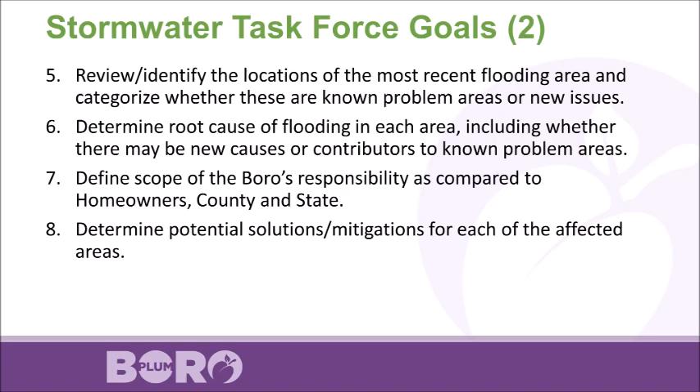Prioritize which solutions can be implemented based on technical feasibility, implementation time, costs and available funding, and the nature and scope of the solution. Implement an educational program that provides residents with information on basic stormwater concepts and best practices for stormwater mitigation. Set realistic timelines for the implementation and completion of any solutions in line with the anticipated manpower, regulatory, and funding realities. Recommend solutions to Borough Council for their consideration to implement, and communicate the progress and results to the public through a report at the monthly council voting meetings.

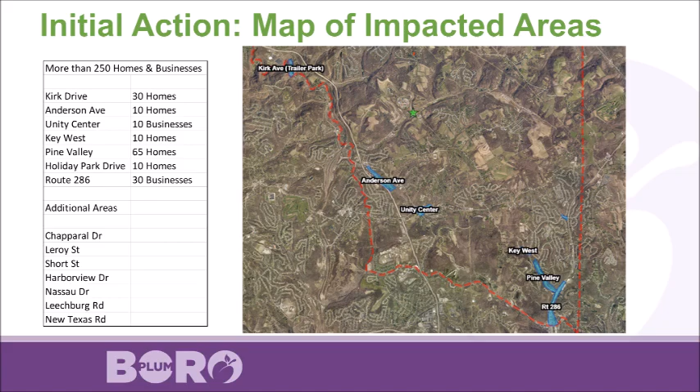One of the first actions of the task force was to identify affected areas in the borough. The task force started by identifying those areas impacted by the July 2019 flooding and other areas within the borough that are prone to flooding. This resulted in the following list of impacted areas. This is a view of the geographic area that includes the more than 250 homes and businesses that were impacted by flooding. Based on the identification of impacted areas, the task force determined the best way to proceed would be to develop a list of both short-term and long-term solutions for each of the identified areas where applicable. This strategy was chosen so that incremental progress could be made on several areas of concern while determining how to address the larger, more systemic issues. Estimated completion dates would be developed for the short-term solutions, and these would be tracked at each meeting to completion. The long-term solutions would then be developed with input from the borough engineer.

Now we're going to discuss the details associated with both short-term and long-term projects. We will begin with the short-term projects. Short-term projects included Anderson Avenue, modifying the existing water flow from the turnpike; Leroy Street, installing debris catcher system; Oblock Key West, diverting stormwater from the stream into the storm pond; and Nassau Drive, replacing the deteriorating pipe and beehive grate.

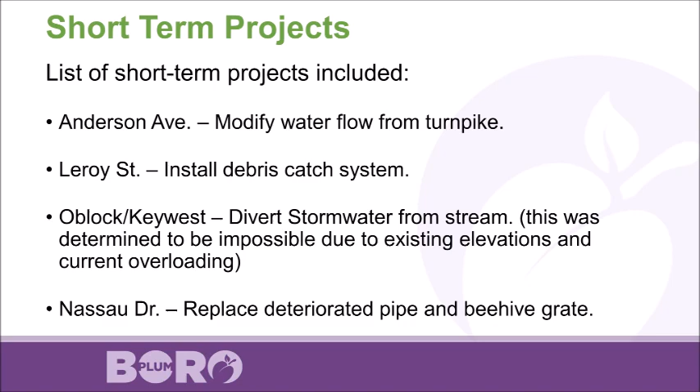3 separate drain pipes carry stormwater from above Anderson Avenue and the Pennsylvania Turnpike to the stream below Anderson Avenue. Borough crews modified the outflow angle of these pipes to reduce the friction and improve flow direction. Additional riprap was also installed to further reduce inflow velocity and erosion at the discharge point.

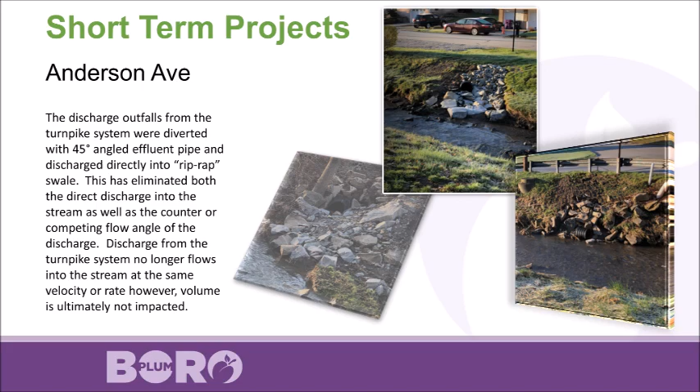Borough crews redesigned and manufactured a proprietary design trash rack or debris catcher to prevent large objects from entering the head wall opening of a culvert pipe. This new design was installed at the culvert crossing under Leroy Street and is now our standard design for all culvert head walls.

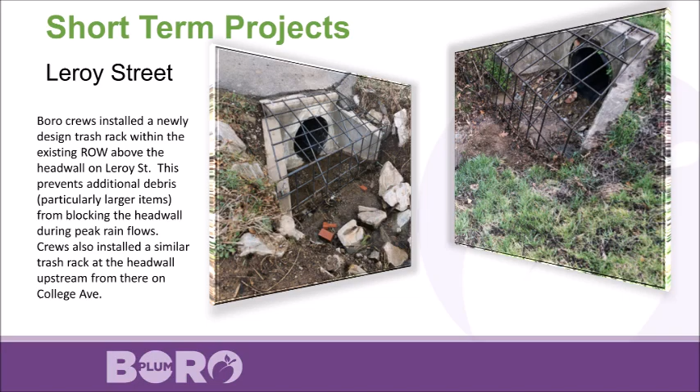In Phase 1, borough crews replaced 180 lineal feet of 30-inch smooth-line plastic pipe and relocated 1 sanitary manhole, which was necessary to install the pipe. The total cost for this phase of the project was $150,000.

In Phase 2, the beehive grate was removed and a head wall was installed. The pipe distance was reduced and a riprap swale or basin was established to avoid stormwater overflow bypassing the drain pipe and rushing past the pipe and onto Nassau Drive. A trash rack or debris catcher was also installed.

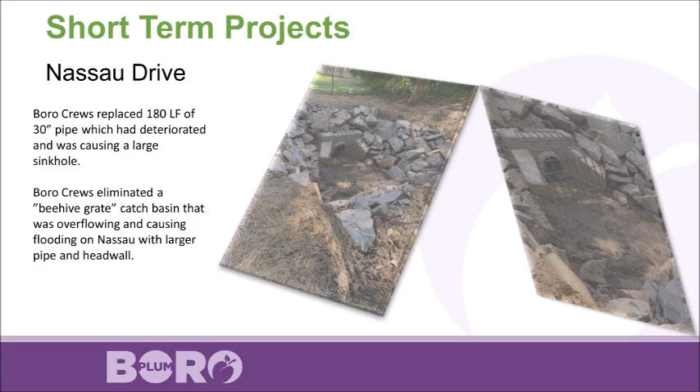Borough staff proposed the idea of identifying strategic locations throughout the borough to investigate possible upstream stormwater storage or impoundment to specifically address the flooding in the identified impacted areas.

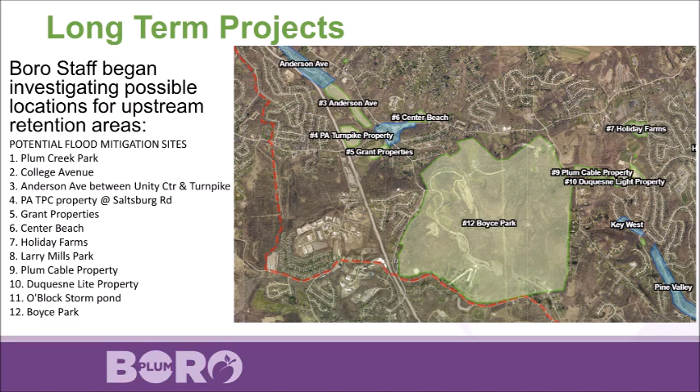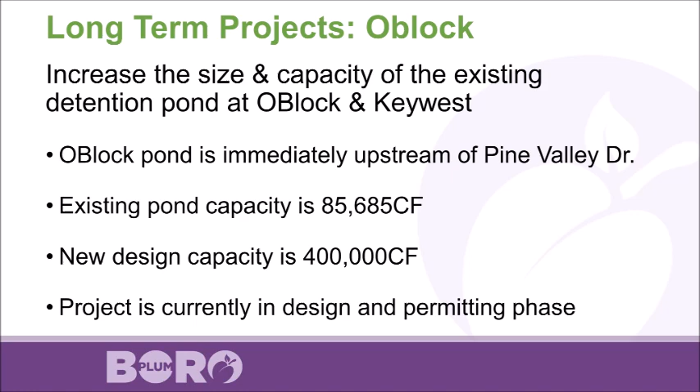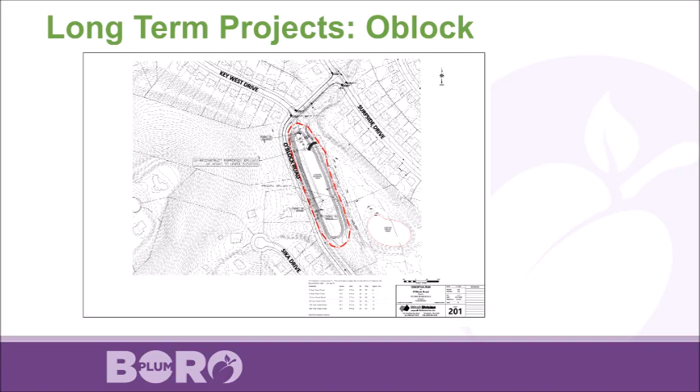The existing pond, located at Oblock and Key West, was originally designed to handle stormwater from the Deer Valley Estates housing plan only. This pond is immediately upstream of Pine Valley Drive, however. The borough has redesigned the pond to increase the retention capacity by 370% to prevent further flooding on Pine Valley Drive. This drawing shows the expanded design of the existing pond. The new retention pond will be nearly 4 times larger than the existing one. This is an enlargement of the design drawing for the Oblock Key West storm pond.

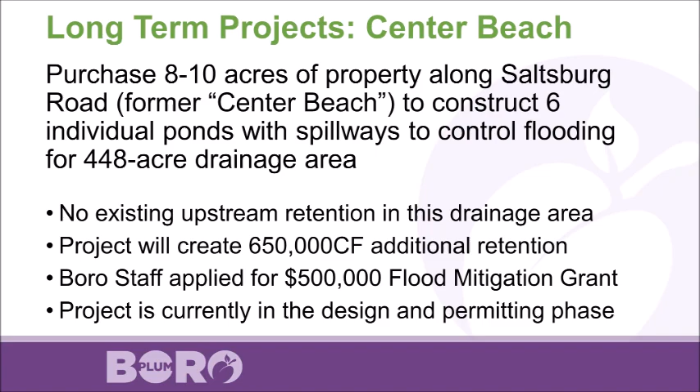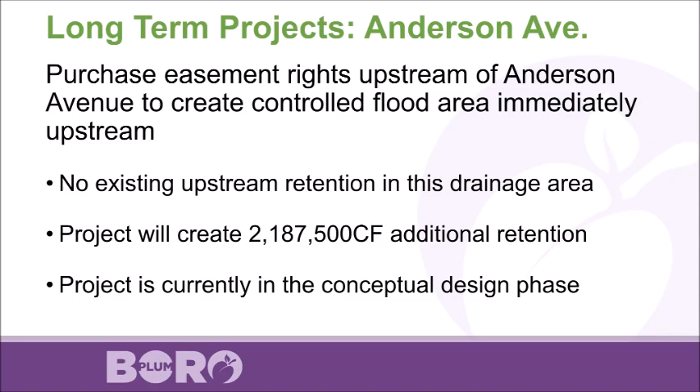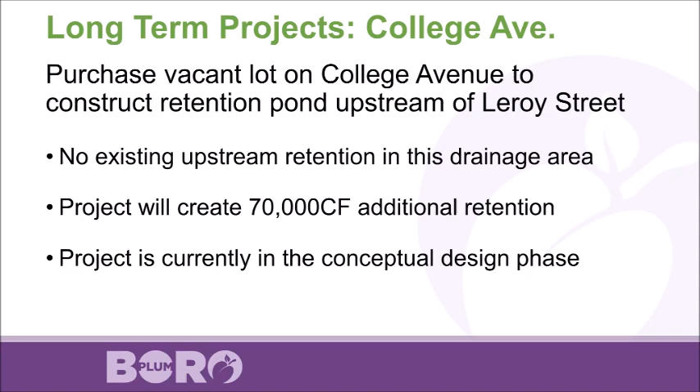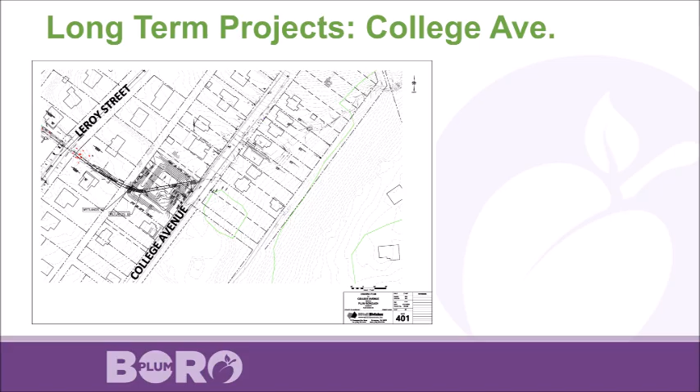In addition to the projects which are the focus of the Stormwater Task Force, in the past 3 years, the borough staff has been working on 7 other multi-year projects to address stormwater flooding concerns elsewhere in the borough. These projects are in varying stages of design and construction at this point. The total cost for these 7 projects is approximately $2 million.

In an effort to improve the overall value of the GIS for stormwater planning investigation, borough staff has added other features to the system. Additional GIS data layers were obtained to include water quality and additional floodplain data, and stormwater lines from some of the older housing plans in the borough were field located and added to the system.

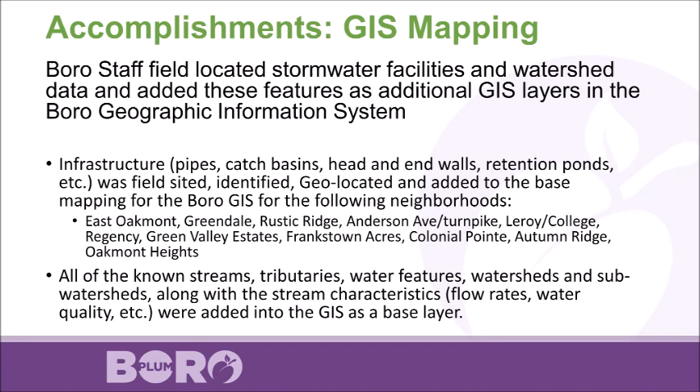We welcome input from the community. You can contact the task force via email. The address is plumstormwatertaskforce@plumborough.com. This concludes the Stormwater Task Force status update presentation. Thank you for reviewing, and we hope you will participate in scheduled public meetings to further discuss stormwater management in the borough.